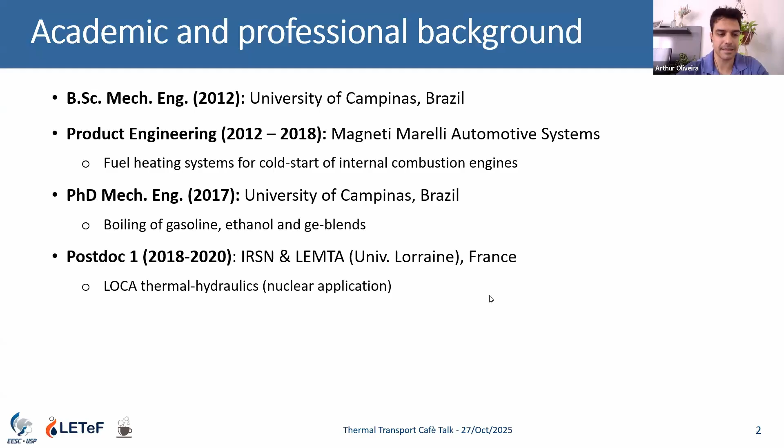Matt just presented my background. My last postdoc is part of what I want to present here, about tests near industrial conditions done at IRT M2P in Metz, France, together with the laboratory from the University of Lorraine, focused on applied and theoretical mechanics and energies. As I said, what we are doing now regarding droplet impact heat transfer is at the University of São Paulo, here in São Carlos City. I'm highlighting São Carlos City because normally people think of São Paulo City for the university.

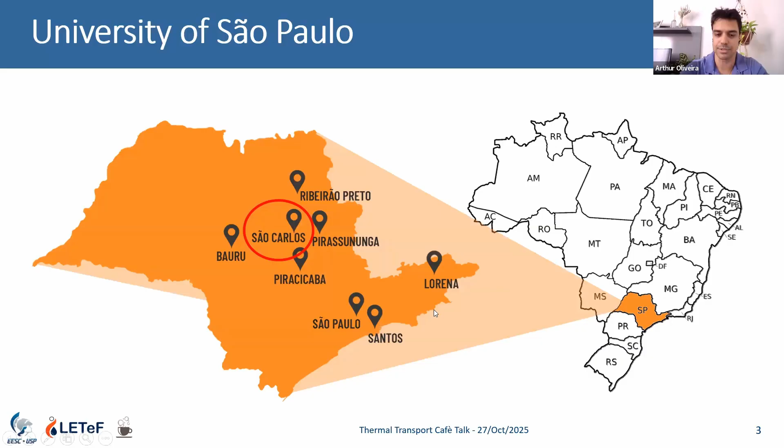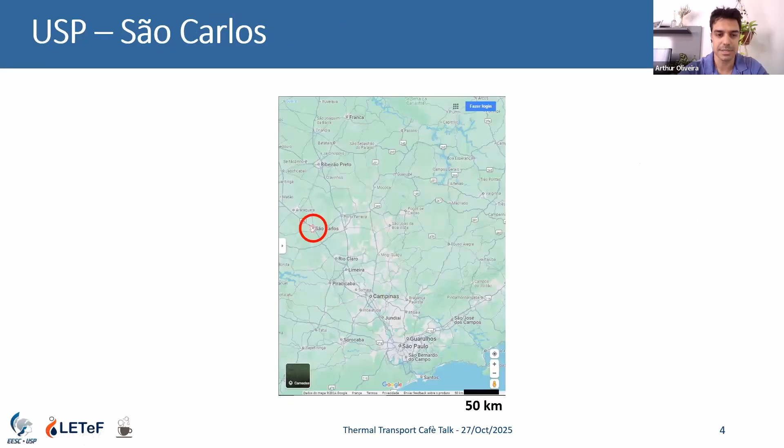When you think of Brazil, you have the state of São Paulo, and you normally think of beach and soccer and very good weather. But sorry, in São Carlos you don't have this because we are quite far from the beach, so you have to go to Santos if you want good soccer and good beach, especially for the soccer team. But if you come to São Carlos, it's close to good city, good barbecue, good nature, good beer, good food, and good coffee. So if you come to São Carlos, I'll be very glad to welcome you and show you the places.

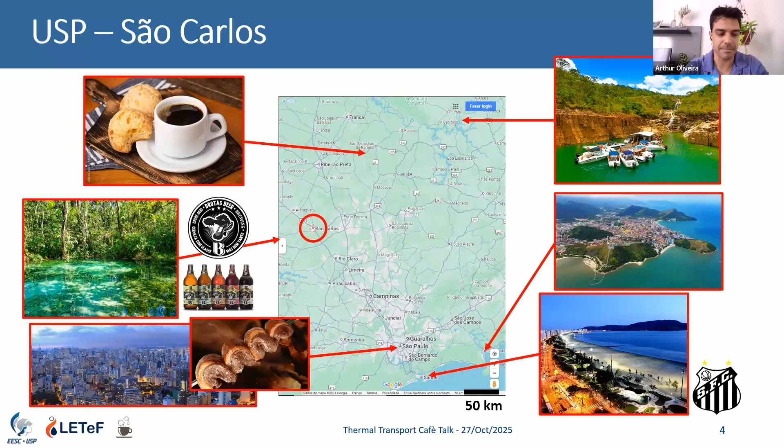So that was just a brief introduction, this marketing moment for the place. Let's go to the talk. I'm going to present the motivations of the research we have been carrying on here in São Carlos.

I'm going to talk about these near industrial conditions tests regarding quenching. This was done in France during my postdoctoral fellowship with Michel Gradeck and David Maréchal from the University of Lorraine, and David from IRT M2P. These results counted with the collaboration of Didier Lawrjaniec from Nova Asco, formerly Asco Metal, and Antoine Avrit, who was a PhD student at LEMTA and is now at CEA.

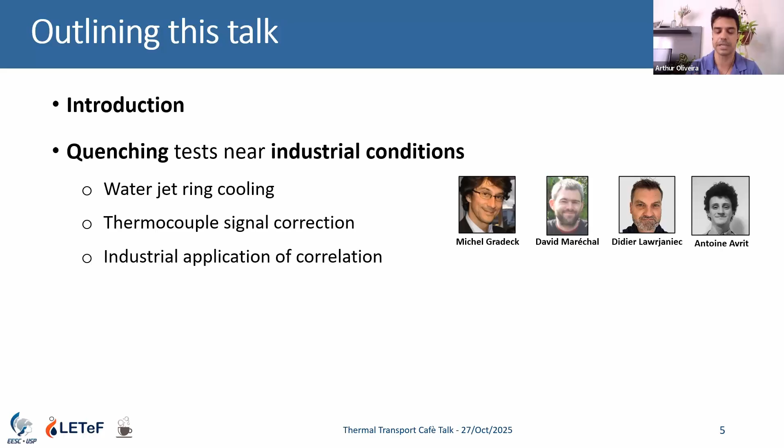Because of this industrial background, I try to link in my research the fundamentals and the applications for research involving quenching. Here in São Carlos, I'm going to show some very recent results we published regarding droplet impact heat transfer. The idea is to go from single droplets to spray and present you a new model that we developed.

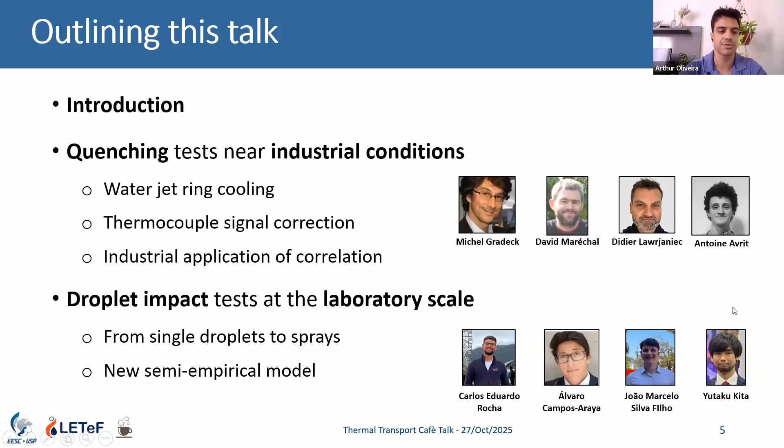Here are the students involved in the project: Carlos, Álvaro, and João Marcelo. This also counted with the collaboration of Dr. Kita from King's College London, who also gave a talk here at TTC a few years ago on a similar subject, so we had a lot to collaborate on together.

Quenching, for those not familiar, is the rapid cooling of a metal alloy, where we intend to tune the properties of the alloy after the process, especially regarding hardness and mechanical resistance. We have a cooling diagram for steel showing temperature over time. For instance, if I want to form martensite, I have to cool down the part very quickly in the first seconds to form martensite at the end of the cooling process. If I slow down, I may form some bainite, pearlite, or ferrite, which have lower hardness compared to martensite.

So when we are cooling down the part to form martensite, that can be very challenging because we are talking about very high heat transfer rates.

That can lead to uneven cooling, so we are talking about stresses and deformations of the final part. When it's regarding large pieces, it's easy to form martensite near the surface of the part. But in the core, because of heat diffusion, the cooling process is much slower, so there you can form other phases instead of martensite.

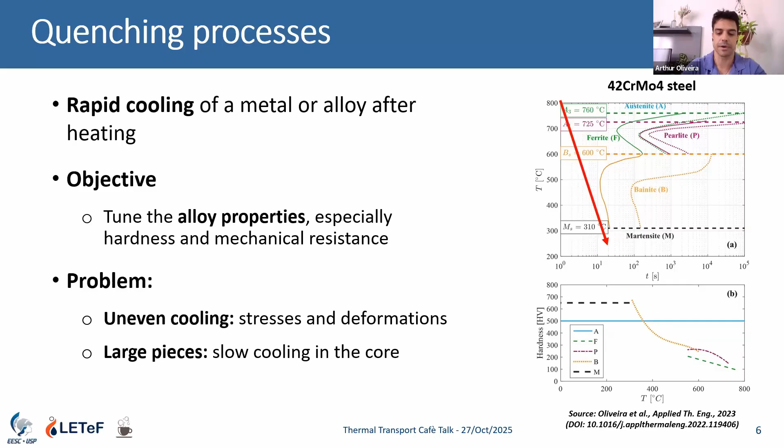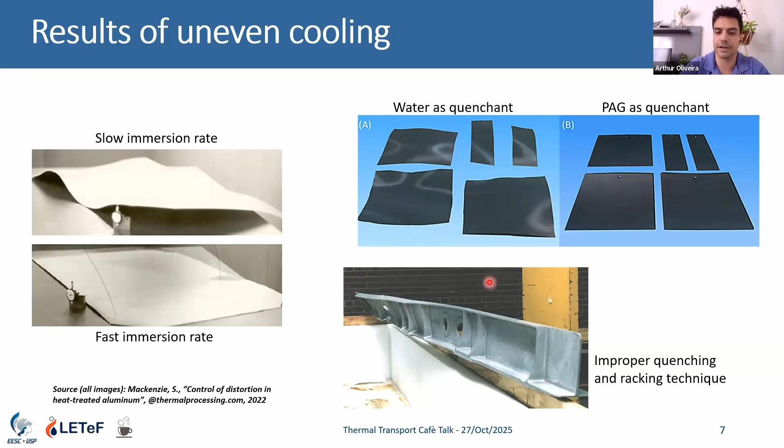To show you some examples, there are pictures by Mackenzie, where he shows the effects of uneven cooling over the surface, and we can see strong deformations of the parts here. So it's very important to design your spray system, your quenching system, to have an even and appropriate final part for your application.

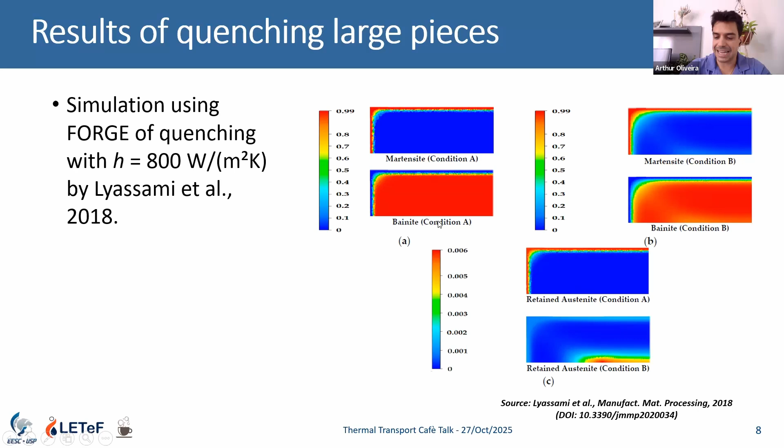For large pieces, there is this simulation by Lyassami and colleagues, where we can see the martensite formation. It's very stable and easy to form near the surface, but in the core it's not that easy. So that's what motivates a lot of research on quenching processes in the literature.

We have a lot of studies regarding plate cooling with jet impingement and also bar cooling processes, also with water jet impingement. The thing is, many of these studies involve small samples, starting at relatively low temperatures depending on the application, and most of them are also testing only one, maybe two nozzles. In the industrial case, you normally have several nozzles working together.

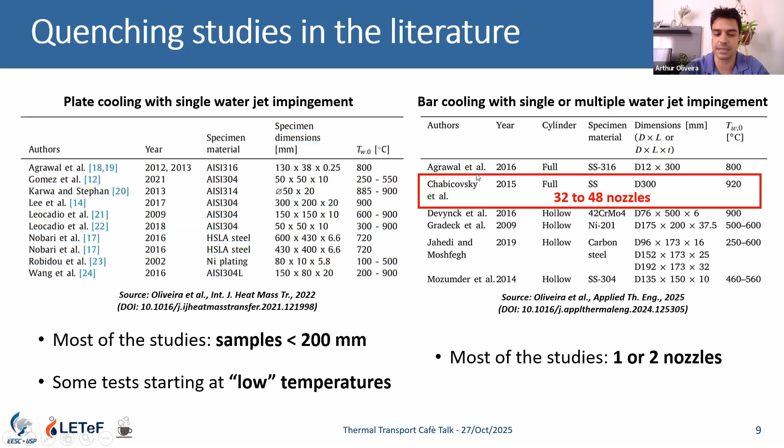I have to highlight the work by Chabicovsky and colleagues from Brno University, where they used 32 to 48 nozzles in a very large piece. This study is indeed very close to the industrial case, but we can see it lacks in the literature, this kind of data. That was the motivation a few years ago, even before I did my postdoc there.

At IRT M2P, together with some industrial partners and LEMTA, the laboratory at the University of Lorraine - the IRT M2P is the Institute for Research on Materials, Metallurgy, and Processes - they built this quenching pilot where they could evaluate the cooling process of large pieces near industrial conditions.

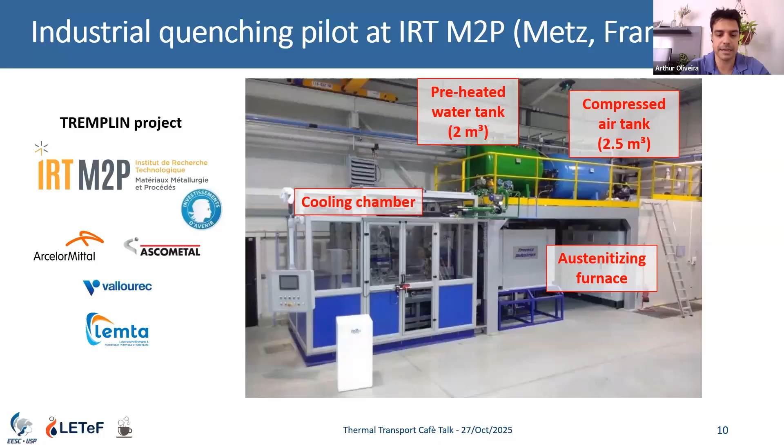So they have a furnace, they have the water line, the compressed air to pressurize the water line, and where the cooling process takes place here at the cooling chamber, inside the cooling chamber. I'm showing you this picture so you can have an idea of the size of the equipment - this must be a quite big experimental bench, but here you may have more details with this schematic drawing.

You have here the furnace, the bar cooling here, the water line - the water is pressurized by the compressed air, so you control pressure and temperature of the water aspersion over the part. In this case, I'm going to show the results for a steel bar: an 80 millimeter diameter bar, approximately 1 meter long.

The thermocouples are located very close to the surface, and they have a regular spacing, which allows us to characterize the heat transfer process along the bar axis. Here are some characteristics of the systems.

The jet ring I'm talking about - I'm going to show you an image soon. We are talking about 120 holes in the water jet ring impinging the bar. They have a small diameter. The initial temperature of the part is quite high - it can be higher in the industrial case, but it's above the austenitizing temperature, which is enough for the quantification of the cooling process.

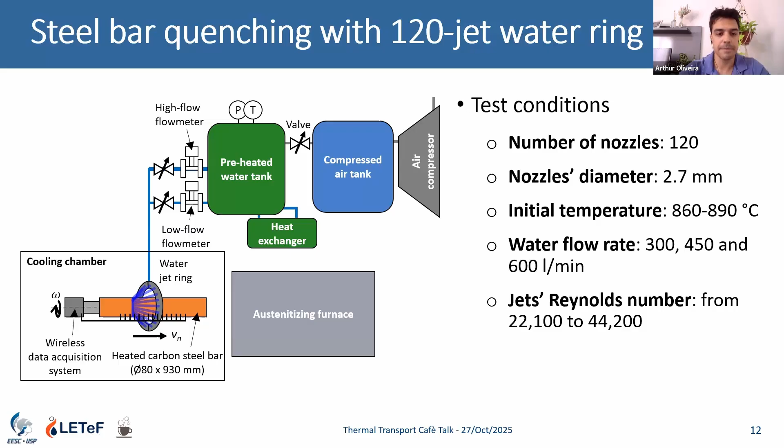Better than showing this image is to show a video. So this video is of the setup at IRT M2P in Metz, and I'm going to run it.

I tested before with Matt if you could hear the sound of that video, but you couldn't. It's quite noisy with all the equipment moving together.

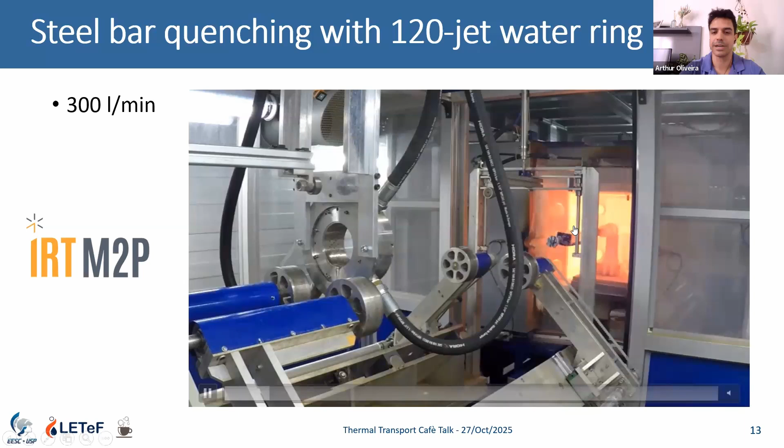Here you have the water jet ring system that I told you about. You can see the hose, the furnace, the bar leaving the furnace, and this box here is where we have the data acquisition system for the thermocouples. We can see the thermocouples over the part, crossing the bar, measuring the other side of the piece.

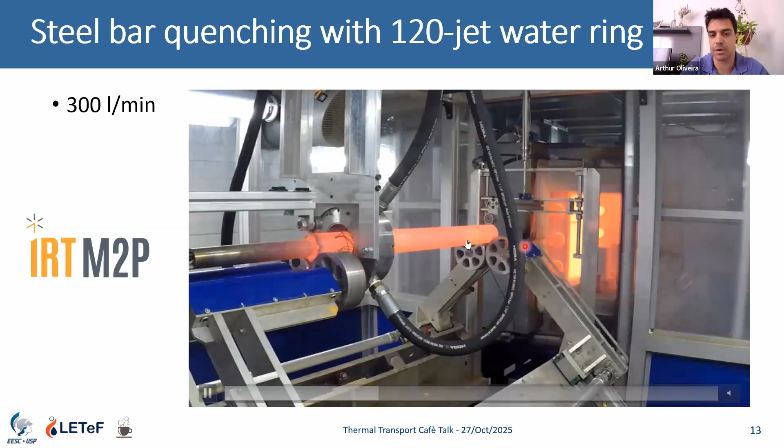So it starts rolling. You start the water injection, you close everything, and we have to wait until the flow is stabilized. So it's stabilizing the flow here before starting to sweep the bar. It's going to start soon.

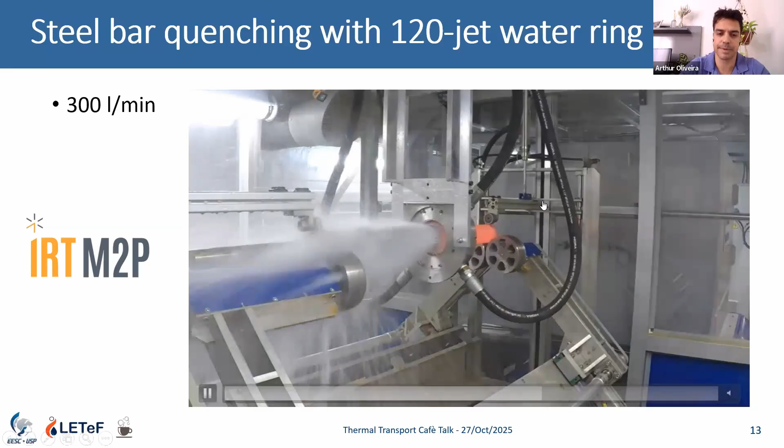During this process, we start the temperature measurement, acquiring the temperature measured by the thermocouples during this cooling process. We have to remember that in an industrial process you have several rings, and the bar passes inside these rings. To simulate this, after finishing sweeping the bar, the ring comes back to the start position and starts sweeping again, doing that several times. The experiment lasts about 2 minutes, going back and forth while we acquire the temperature.

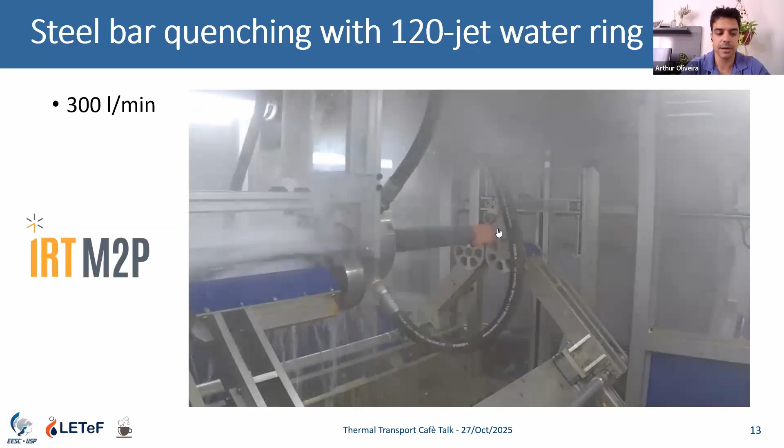To quantify the results, it's not only the temperature measurements that matter. We want to quantify the dissipated heat, the heat flux, as a boundary condition for this bar. We consider constant properties, an axisymmetric problem in cylindrical coordinates. After a few simulations, we realized we could neglect the axial heat conduction in this process to quantify the heat flux, so we have a 1D transient problem that can be solved, for example, using Laplace transform.

We have the temperature measurements, and we have the thermal impedance that we can calculate with the equations I showed, knowing the material properties, geometry, boundary conditions, and thermocouple position. But we want to estimate the boundary heat flux, and that's the ill-posed problem.

So we need regularization here. There are several methods in the literature. We used Beck's function specification method, which gives us a pseudo-analytical solution for the heat conduction problem. The advantage of using a pseudo-analytical solution is that you have very fast computation of the data, and you have quite good accuracy to compare the results.

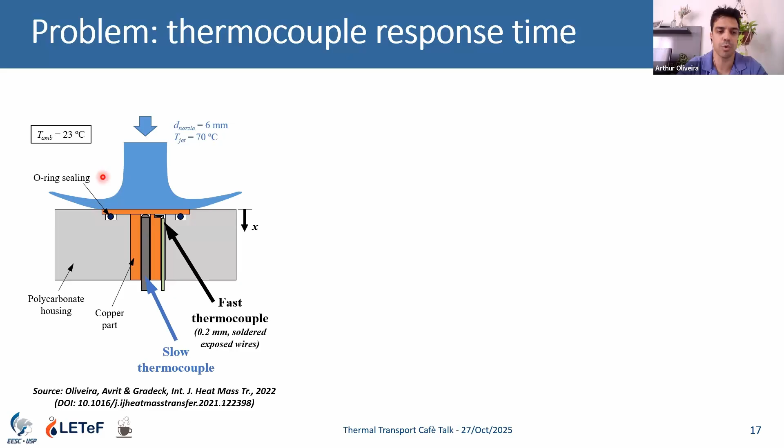In this prototype experiment, you put a fast thermocouple together, and then you put hot water from a kettle, for example a boiler—you can boil water and put it over your part. Then you compare the thermocouple responses.

When you do this, you have the fast thermocouple here, the thermal response, and the estimated heat flux with this fast thermocouple. When I use the slow thermocouple, for example a 1 millimeter thermocouple, the thermal response is dampened, and the heat flux estimate is a little affected.

So the method we propose can reconstruct the thermocouple response. You can see it's very close to the reference, the black line, and the estimated heat flux gets much better. We also tested that for a very slow thermocouple, a 3 millimeter thermocouple, with a very slow response time.

You can see the response time is comparable to the experiment time. After correcting the thermocouple signal, we don't care too much about the temperature measurement, but you can see that the estimated heat flux is much better with the signal reconstruction compared to the original signal estimates.

So in all the quenching tests that I'm going to show you now, the results, we are using this method to correct the thermocouple signal and have a better result of the heat transfer process.

For those who are interested, we have this paper here so that if you want to do this test on your own, using your own instrumentation, we made available the code for you to estimate the thermal response, the response time of the thermocouple, the heat loss parameter, and also the code to correct your thermocouple signal if you are using fast cooling or heating processes. We made this available exactly to have better results in the literature.

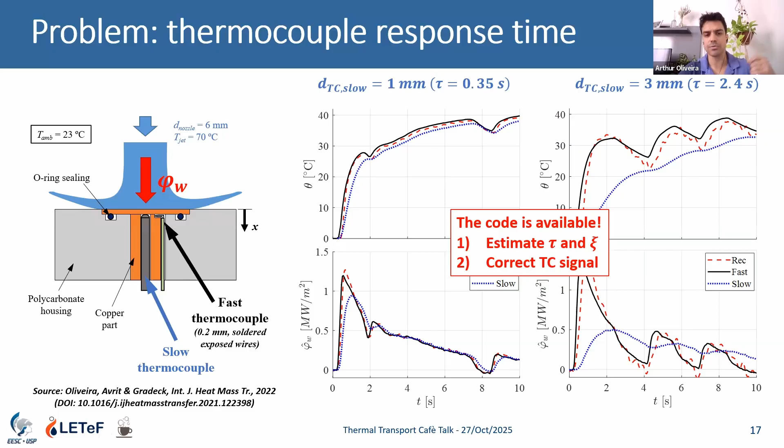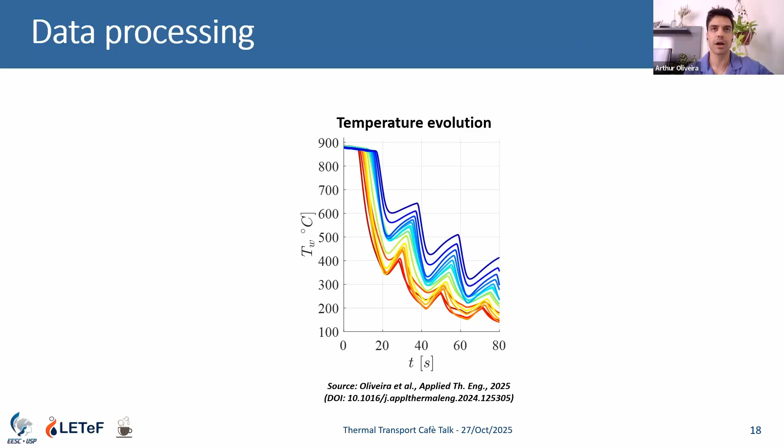So the results we had from the bar—we have 15 thermocouples here. These results that I'm showing you already account for the thermocouple correction method that I showed you.

With this response time, we can estimate the boundary heat flux with the inverse method that I showed you over time. We can take the peak heat flux for each ring pass, and that point we're going to consider the maximum heat flux point.

These points are going to be very useful for us for the data analysis. If we take the derivative of the temperature, we can also have the maximum cooling rate point, where the derivative is maximum in absolute value. That's also going to help us in the processing, as well as the onset of cooling point.

So you have air convection and radiation at first, but when the jet impacts the thermocouple location, the position, we have a sudden drop in temperature. This is the point that regards the onset of quenching, or onset of cooling, as you prefer. Keep in mind these 3 points—we're going to use them later.

Going to the results for 300 liters per minute: we have thermocouple 1 on the left-hand side, and thermocouple 15 on the right side. Over time, we have the temperature responses here. As we expect, the ring goes from left to right.

So the temperature drop is important in the first thermocouple. Then the last thermocouple sees the same, gets the same result. And here you can see the evolution in the heat flux over time for each thermocouple.

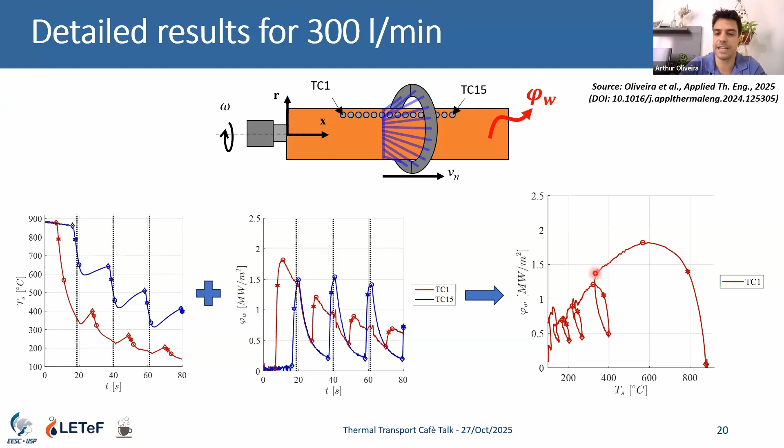Let's say for one thermocouple, you have here the onset of cooling, maximum cooling rate point, maximum heat flux. Then you have the cooling process, the end of the first pass, the decay in the heat flux, and this loop profile of the boiling curve.

And we can do that for the 15 thermocouples, and now you can't see anything else. It's very hard to analyze anything from this mess.

So what we realize is that, what if we reject unphysical data? Because as we are using an inverse method, we have unphysical results here. For instance, let's say this is for a simulation here, heat flux over time.

Let's say I want to estimate the heat flux profile evolution as the black line. When I apply my inverse method, there is this regularization that causes a kind of penalization, a kind of degradation in the heat flux estimate to stabilize the calculations.

So this part here of the calculation, where we see this increase and then this loss of the peak, is not physical. This is a mathematical feature of the method, so it's not a reliable result, this part of the result.

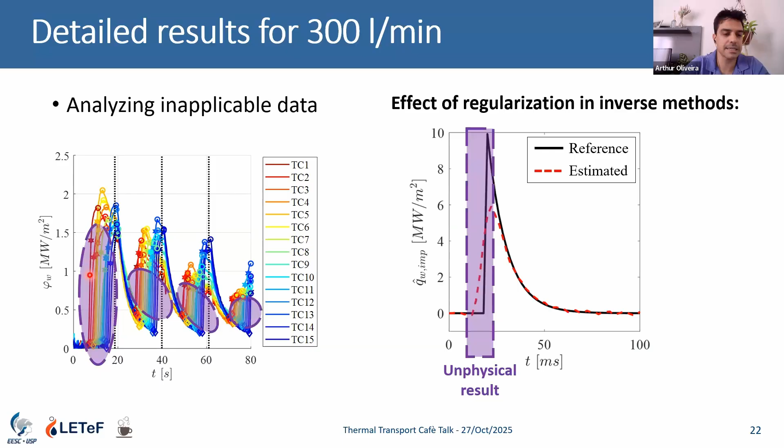So considering our simulations, our results with the bar cooling, this raise in the heat transfer, heat flux must be neglected. And the other characteristics, now considering the industrial process, our test will have the static bar and the ring is sweeping the bar.

But in a real industrial process, we have several rings and the bar is passing inside the rings, so we don't have this kind of dry moment of the bar in our industrial setup.

So we can try to neglect also this heat flux decay to try to represent in our experimental setup the industrial case. So when we do this in our boiling curve and we remove the unphysical data, now we have a kind of correlation between the heat flux and the surface temperature.

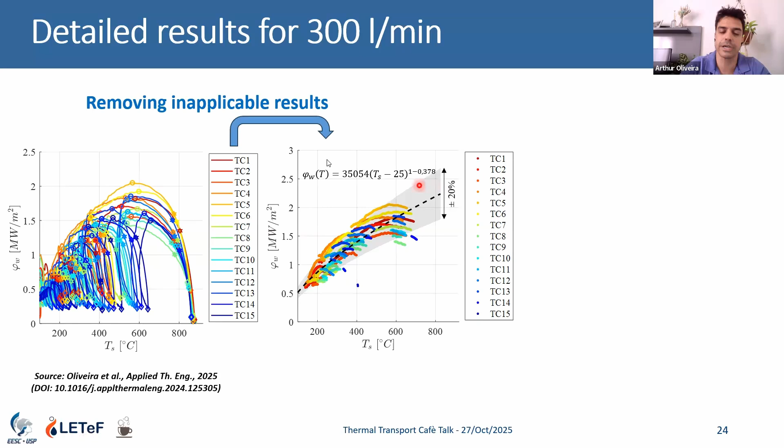Now we just see this kind of correlation. We can try to fit an equation here to relate the heat flux and temperature. And we can also translate that to heat transfer coefficient, depending on the industrial partner preference.

We have a very minor effect, actually, but we try to understand what happened here. Why didn't it increase?

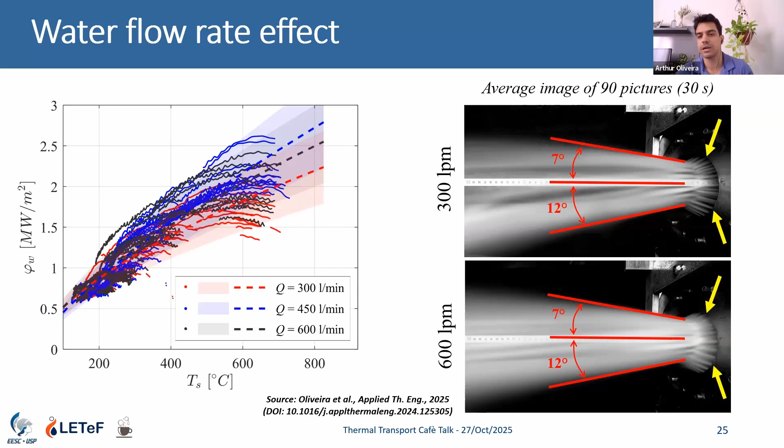What we realized, we have a difference here at the nozzle. When you compare the three conditions, we can see a kind of fog near the nozzle for 600 liters per minute. So we're starting to have some atomization here, which was confirmed when we put that in the Ohnesorge diagram. We are getting closer to the atomization regime.

So as we are talking about 120 nozzles, when you have the atomization, this droplet will be dragged by the air inside the systems, or even by the jet, and maybe will not even reach the wall. So that can be kind of a degradation of the heat transfer.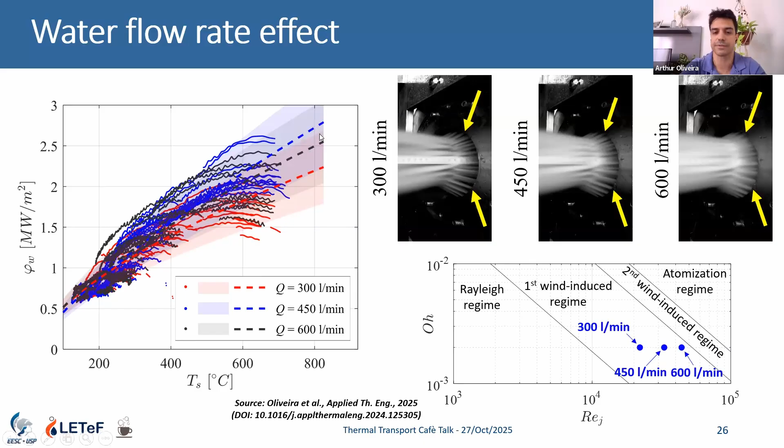Because here we are talking about a much larger scale compared to what we see in the laboratory. We are talking about many more nozzles, a much higher water flow rate. So maybe we kind of reach a saturation here in the heat transfer. But this is a very strong affirmation to make.

So after a new test with a thermocouple in the core, because if we have very different heat transfer conditions, we should see a temperature difference in the core of the material after a while. But when we did the test, after 2 minutes of cooling, there is no major difference in the temperature measurement in the core of the part.

You can see that after a 500 degree drop, there is only 2 degrees difference between the two tests for the two flow rates. So no, there is no major effect of the water flow rate in these conditions, of course.

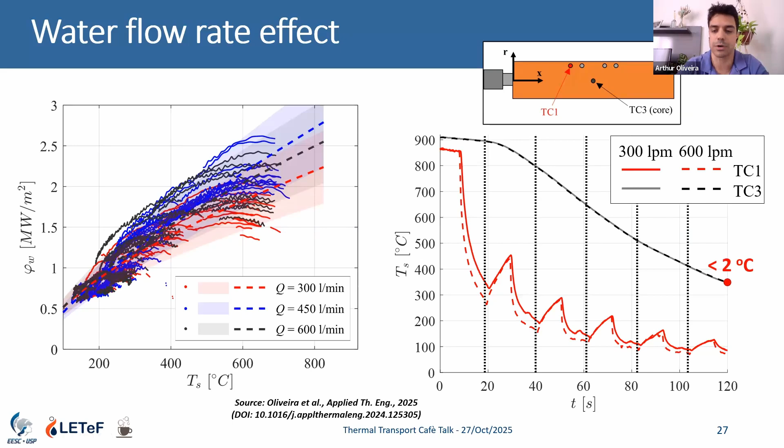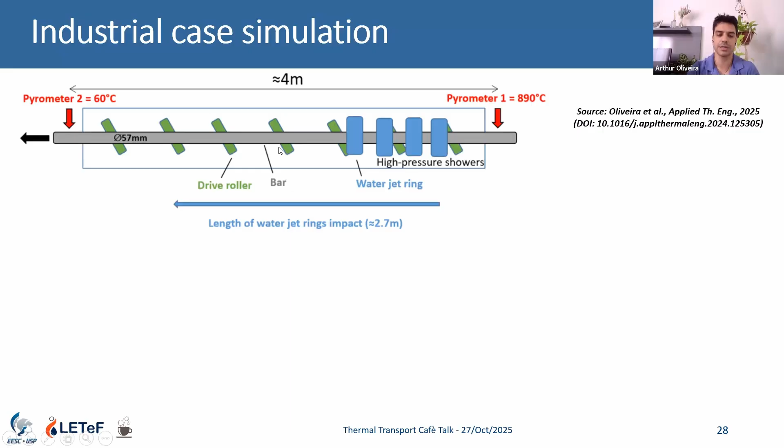And when we use the correlation we proposed for a real industrial test, so here we have a real industrial line, we consider the parameters to use the correlation, we consider metallurgical effects, and considering that there is a very simple equation to put in your model...

we quite had a sufficient, sufficiently accurate result, let's say, comparing the experiment and the model. After almost 900 degrees temperature drop, we had only 80 degrees difference between the model and the experience, the simulation, the experience.

And that can also be related to nonlinear effects, because when you have phase transformations, you have latent heat of phase transformation, and you don't have constant physical properties. So that can play a role.

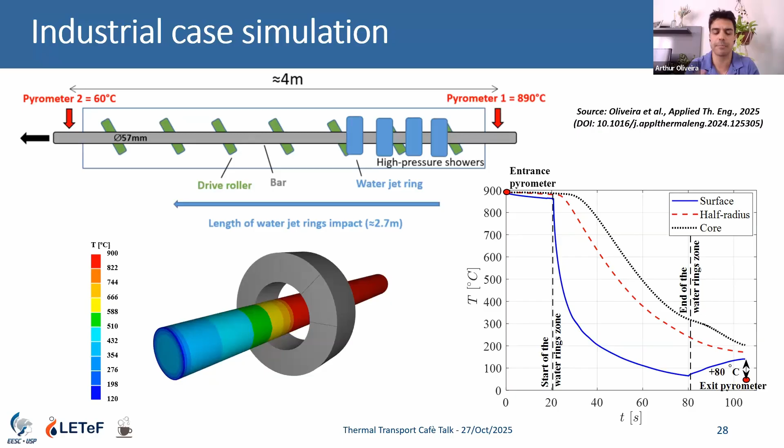So that's the first part of the talk, when I wanted to show this industrial condition, because what happens is that during this industrial background that I had, when you have a problem in the industry and want to solve it, sometimes you need to scale down your problem to try to answer it. And that's why we need reliable and high quality laboratory data to apply to the industrial case. It's not new what I'm talking about, but when you have a scale change in engineering, this problem can go from industrial case to pilot scale to laboratory scale. And that's very challenging when involving phase change processes.

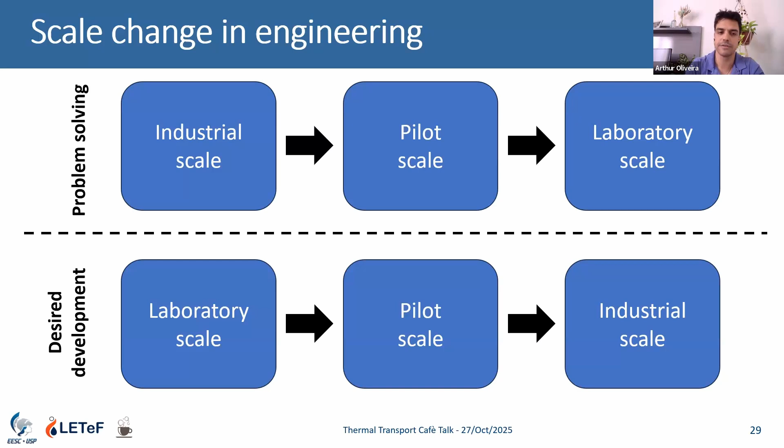And also for development, and I think that's one of our roles in the university, you have a desired development, you see something at the laboratory scale, you try to increase the scale, and that can also be very challenging, sometimes frustrating, to not see exactly the same phenomenon as we scale up or down the problem. So that's actually the motivation of my research here at the University of São Paulo regarding quenching using sprays.

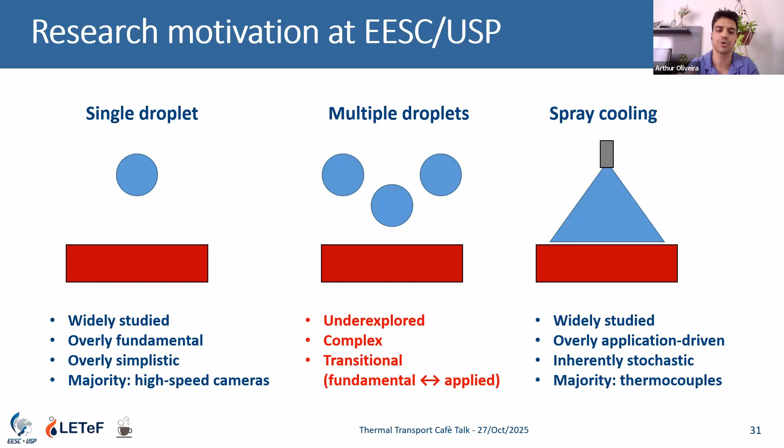We have a lot of data in the literature regarding single droplet impact heat transfer, but that's actually too fundamental. And we also have a lot of spray cooling data in the literature, but that's very application driven. Sometimes one result for spray cooling cannot be easily extrapolated to another condition. So maybe testing multiple droplet impact is a way to link the two problems. So that's the objective of our research here at the Laboratory of Thermal Engineering Fluids.

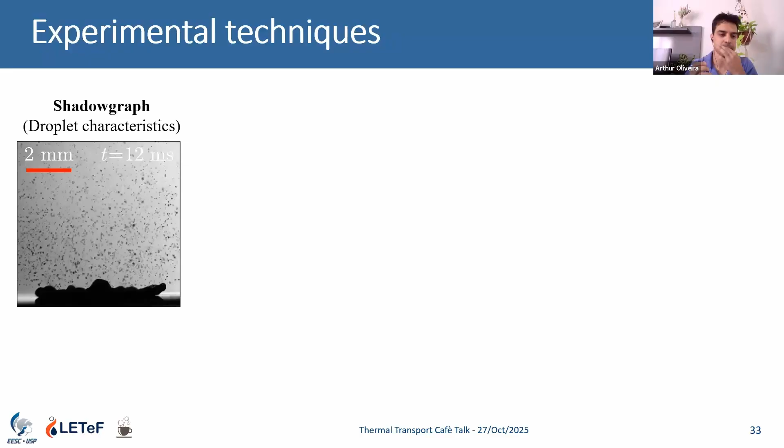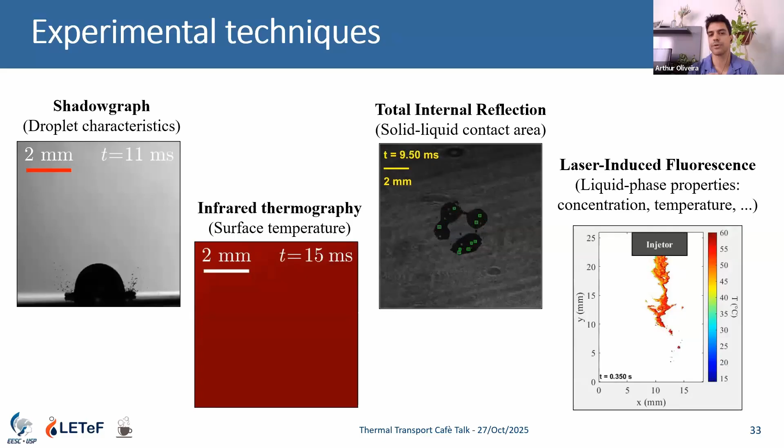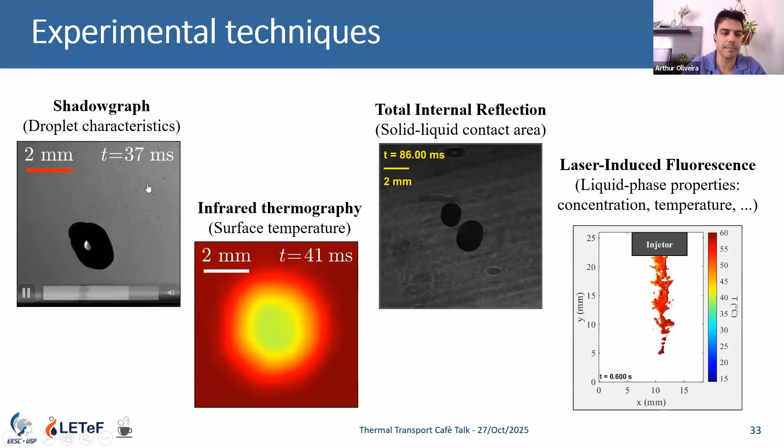So we use shadowgraph, infrared thermography, and total internal reflection as techniques, as well as LIF to measure the liquid temperature. The videos I'm showing are examples of results we had here in the lab, but to focus on only one result, I'm going to show results we recently had and published regarding shadowgraph and infrared thermography for droplet impact heat transfer over a metallic sheet.

So we have here the stainless steel plate, which is heated by Joule effect. We characterize the droplet impact by shadowgraph, and the infrared camera measures the surface temperature. And here are some characteristics of the tests.

We have water as test fluid. We have a fixed droplet size of 2 millimeters. We vary the impact velocity by changing the droplet release height. And the plate was a 0.5 millimeter stainless steel plate.

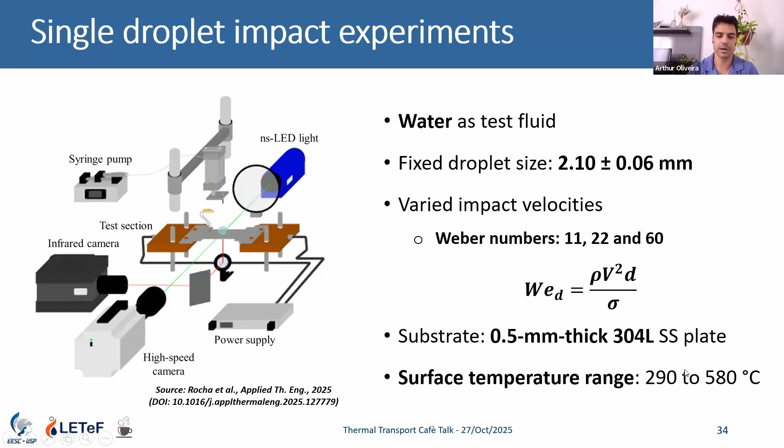As this is very new for us here in the group, the tests started by the end of 2023, so it has been almost 2 years that we started having the results. We started with relatively low temperatures, and now we are starting an experimental campaign to go to much higher temperatures.

But the raw results we have from these experiments are the shadowgraph images that you can see here and the infrared images. And you can see some characteristics of the image acquisition here.

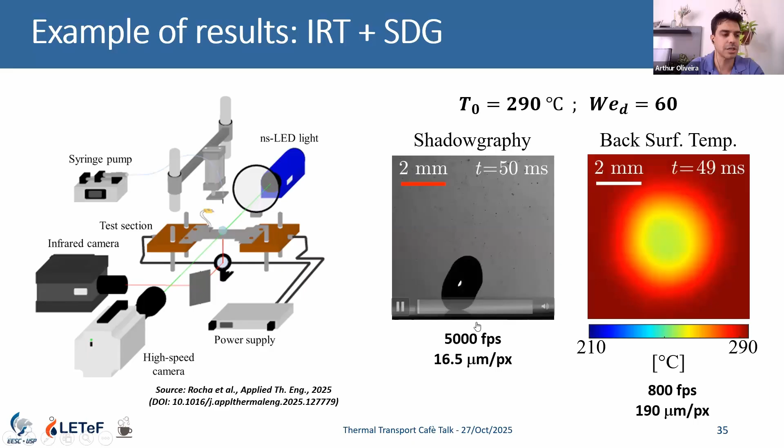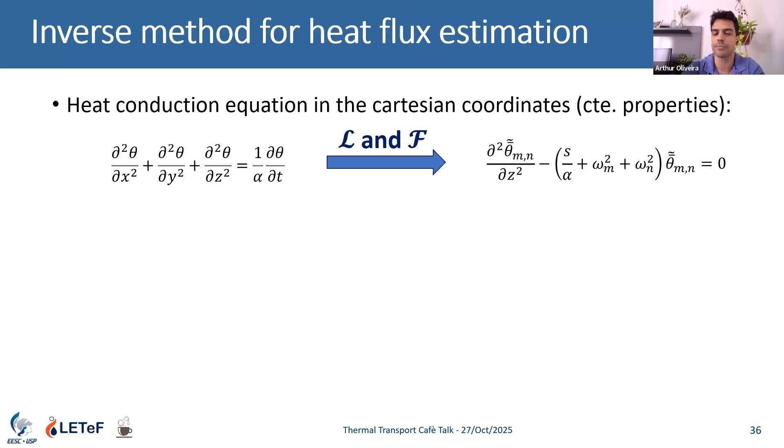So as before, we need to develop an inverse method here to quantify the heat flux field over time for our droplet impact process. Now we have a 3D transient problem, and we use Laplace and Fourier transform to get an ordinary differential equation. Using Laplace transform, we have the solution in the Laplace space. And we also use the same algorithm to invert the Laplace function.

And we discretize that by considering a constant heat flux profile per time step. The difference now is that we are estimating the heat flux harmonics in Fourier space, so we need to go back to the real space using Fourier cosine transform in our case.

And we can also estimate the temperature of the plate by solving the direct problem using the estimated heat flux. So we estimate the temperature harmonics and finally the temperature field during the droplet impact. Because with a metallic plate, we are measuring the back surface temperature, but I'm interested in the surface, the impacted surface temperature. So that's what we are estimating with this equation.

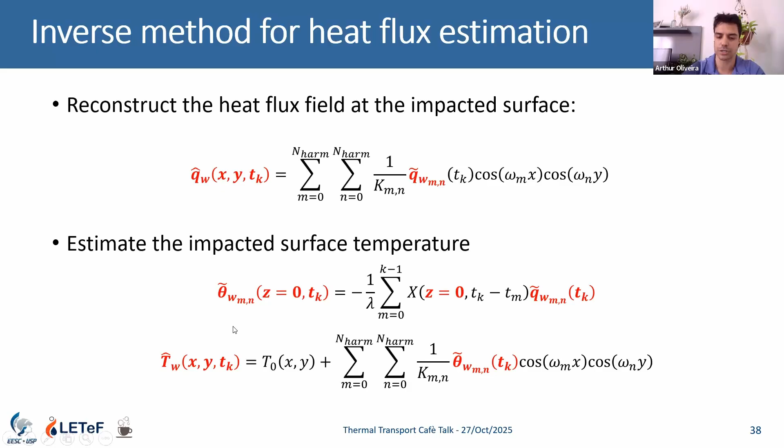So here you can see the results. We have the shadowgraph here, very nice images. This is the infrared thermography images. And this is what I showed you, the estimates from the heat inverse method, the heat flux evolution over time and the impacted surface temperature evolution over time.

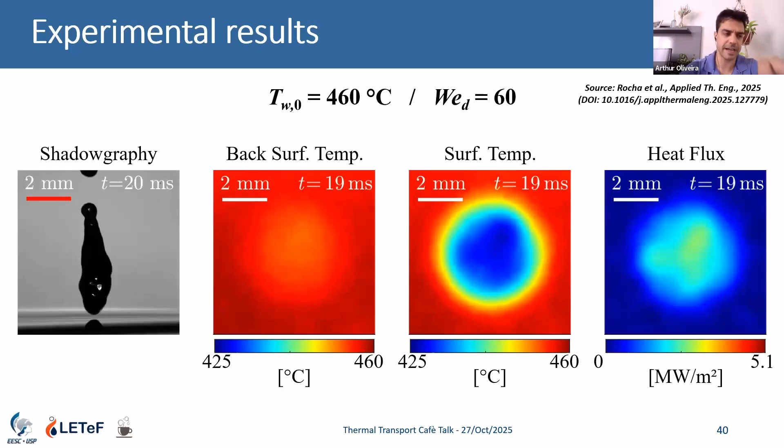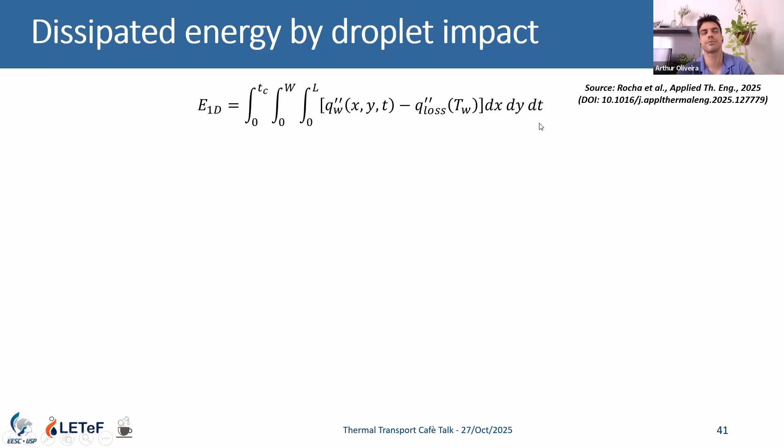But as I said, I'm interested in the amount of energy that's dissipated during the droplet impact. So we need to integrate the heat flux over time and space, and when you do this, we go from megawatts per square meter to joules of energy.

One interesting thing that happened: I presented preliminary results at a conference in Edinburgh, hosted by the University of Edinburgh in 2023. Talking to Dr. Yutaka Kita, he had very different results compared to what I had. So we decided to investigate that together.

Carlos was an undergrad student here from the lab. He spent some time at King's College under the supervision of Dr. Kita.

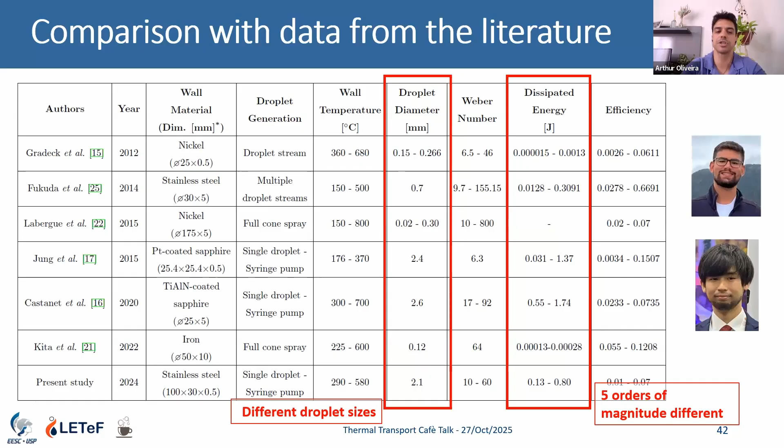After compiling a lot of data from the literature, there is a very big difference in the amount of energy reported. There are some results of microjoules of energy and others of joules of energy. That's evidently because of the droplet sizes tested. If you test much larger droplets, they're going to dissipate much more energy, that's for sure.

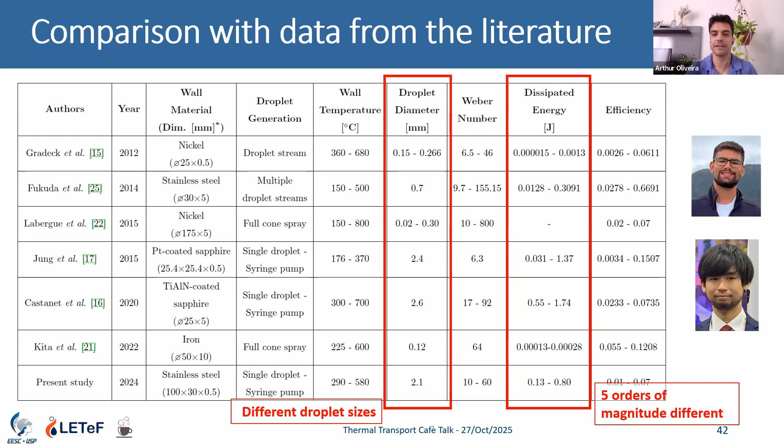But we also compared that for very different droplet generation methods, from single droplet to droplet streams to spray cooling. So although working with five orders of magnitude can be tricky, there are some studies that work with effectiveness, or what we prefer to call efficiency, of the droplet impinging cooling process.

The droplet heat transfer efficiency is the amount of energy the droplet dissipates, normalized by how much energy it could dissipate, let's say if it was heated until saturation and then completely evaporated. When we do this for single droplet impact, droplet stream, or spray cooling, even for those very different droplet sizes, all the efficiencies now fall inside the same order of magnitude.

So that was very nice to see, the droplets collapsing very close together to the same order of magnitude. That's reasonable because the droplet mass depends on the third power, the cube of the droplet diameter.

So what we decided was, okay, what if we try to model the droplet efficiency to see if that works? And then we tried to do a scaling law model just to see how it was working. So let's say the droplet impacts the wall at a given velocity and has a size d at time 0.

And during the contact time, it becomes a pancake with a diameter dc, constant vapor thickness, and we have heat conduction during this process. Then the droplet bounces off the surface.

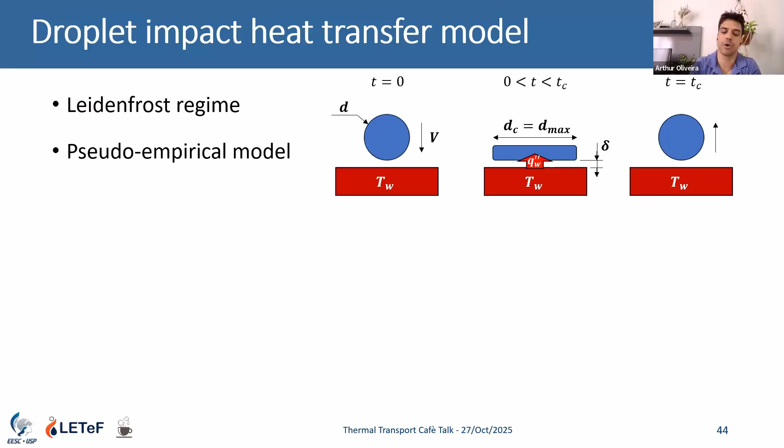We have a scaling law process, as I said. We are working in the Leidenfrost regime, so the data we collected only regards the Leidenfrost regime, at least as reported by the authors. And then we have the total dissipated energy as the integration of the heat flux over time and space.

So if we consider heat conduction, we have heat conduction through the vapor layer, and then the vapor layer thickness plays a role here.

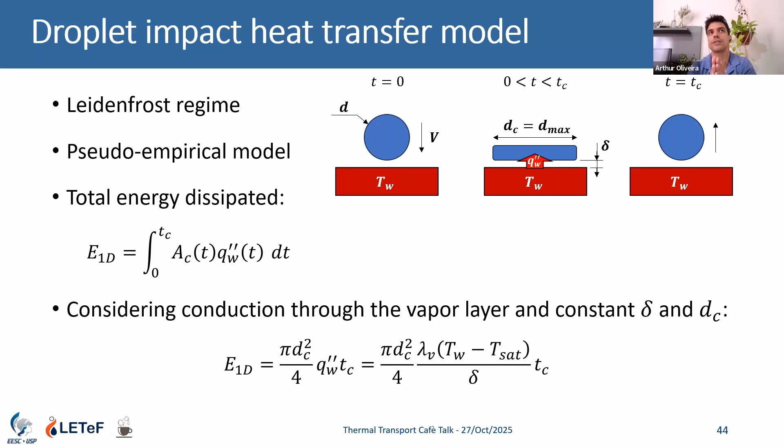And when we wanted to apply the scaling law, let's not take the vapor thickness for an impacting droplet, but for a sessile droplet for a moment. That's a quite well-accepted model at the moment in the literature, as reported by Anne-Laure Biance and Guillaume Castanet.

And then we have this model here. Let's put that in the equation. And now we have a contact diameter and a contact time to model here.

So we took our results and we saw that it depends on the Weber number to the 1/3 power. This exponent can change a little from the literature, but we have other authors that reported the same power as us. And we used Rayleigh oscillation time here as a characteristic time.

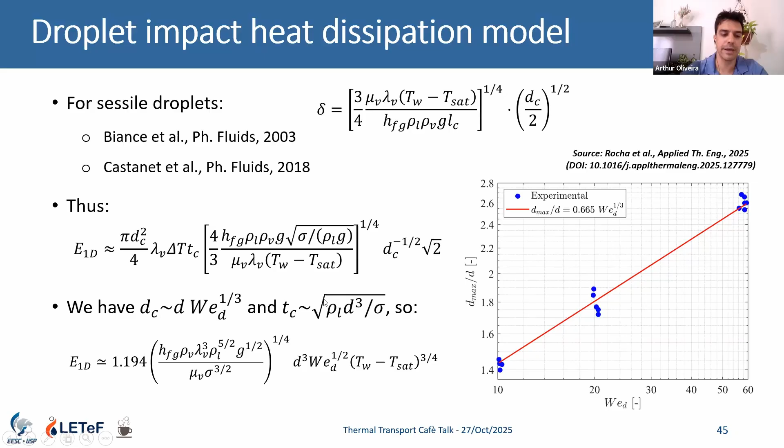And then when we put that in, we have this equation for the amount of energy which is dissipated. So if we put that as an efficiency now, it suffices to divide that by the maximum energy it could dissipate. And if we take that for water at 1 bar, the sensible heat is about 14% of the latent heat. So if we take this and put them all together, this big equation becomes this very simple correlation here.

Where we now have the efficiency depends on the temperature difference and the droplet Weber number. We have a fluid parameter here, which we call xi. For water, for example, we have this value.

And now we have, as always, we need in a scaling law, a fit parameter. Considering the data we collected, the fit parameter is 2.8. So we were happy to see this parameter because it's in the order of 1, so the scaling law we used is not too far from reality. If we found, for example, a fit coefficient of 1,000, we'd see that something was not right, but it's close to 1, so those are good.

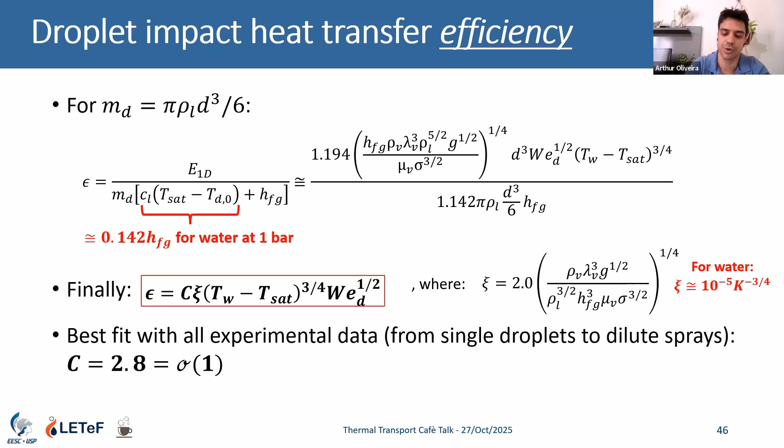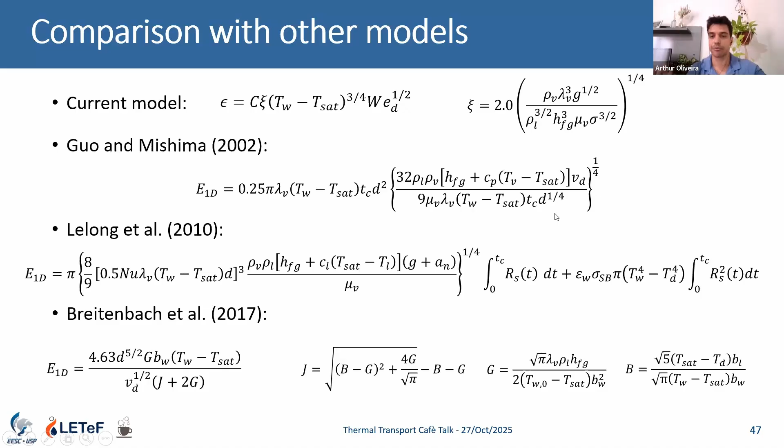That's good news actually. So what we did, let's compare that to other models from the literature. We have Guo and Mishima's, Lelong's and colleagues, Breitenbach and colleagues, where they had very elaborate models. And let's try to compare with the collected data.

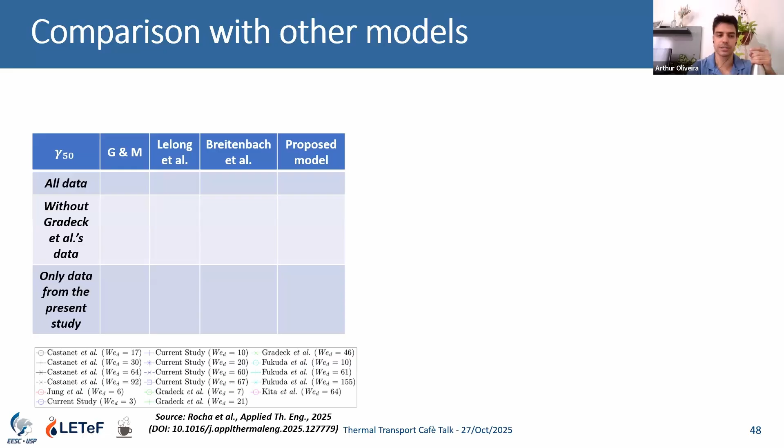But for this comparison, what we did, we used the parameter gamma 50. This parameter is how much data, the amount of data in percentage, is estimated correctly by the model with an accuracy of 50% or better. That's kind of funny because 50% is a lot, we know, but when you compare the models, we're going to see 50%. If we are within 50%, it's very successful actually.

And now we are considering all the data we collected. In this case, we are talking about more than 1,000 points.

We also did the analysis considering removing Gradeck and colleagues' data from the analysis, because among the more than 1,000 points, more than about 900 points came from Gradeck and colleagues' data. That's a very powerful database they have, and that's only possible because they did a transient analysis, which allows you to have a very good and very large database.

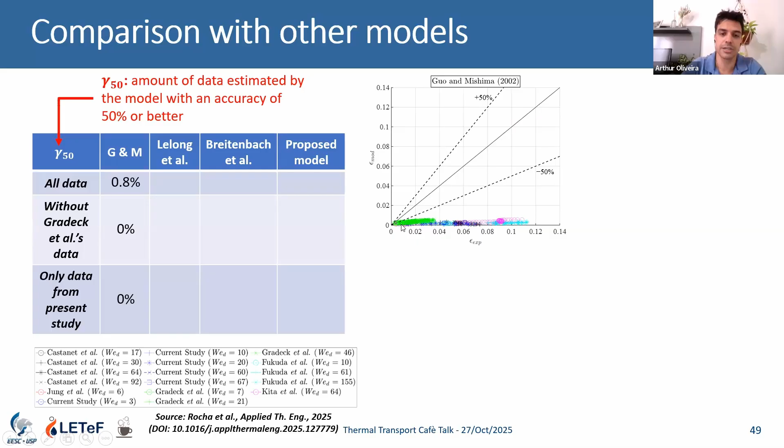So to be fair to the others, we also did this analysis removing their data and also comparing the data from our paper. And when you see this, Guo and Mishima's model performs quite poorly compared to the data. It underestimates a lot the cooling efficiency.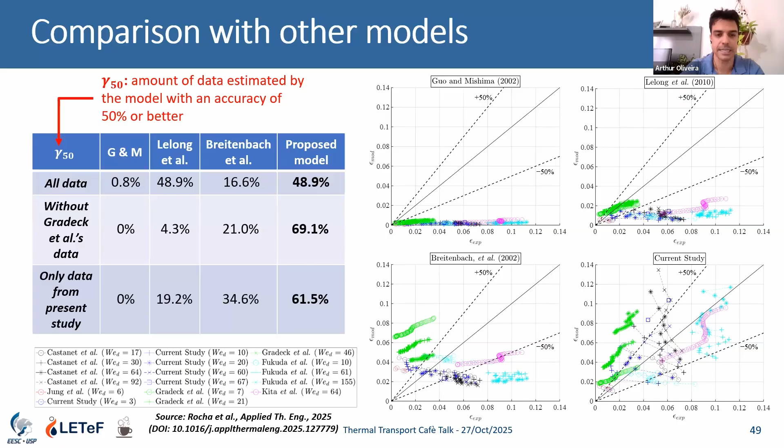So this has been very recently published here. That's something I was waiting to do in this presentation, to have some kind of validation of what we are presenting. But what we are working on now here in São Carlos is trying to improve this heat transfer model.

Okay, now we need to consider the dynamics of droplet impact. What if it's not in the Leidenfrost regime? So we have other techniques we are implementing.

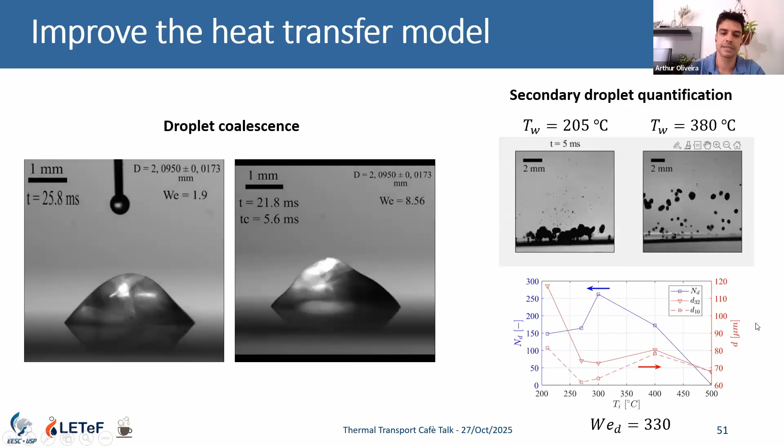We are quantifying, for example, the solid-liquid interface and droplet coalescence. When you don't have a dilute spray anymore, let's say we have a denser spray, we are starting to study droplet coalescence and secondary droplet quantification as well, because that's going to help us with the mass and energy balance of the systems. So it's still a work in progress, but that's what I want to talk about here.

And then the main thing, I know I did two talks in one, industrial scale and laboratory scale, because there is still this large gap between the two of them. And it's very challenging when involving quenching.

But the thing is, even for the same scale, for example laboratory scale, as I showed you for droplet impact heat transfer, we need these pilot scale experiments. But even at laboratory scale, we still have a large discrepancy between the data, the results, and the models. So we still need more research on that, even before, or maybe together with, a scale change in quenching and heat transfer. Because the idea here for our group today is that dripping droplets hollow out stone.

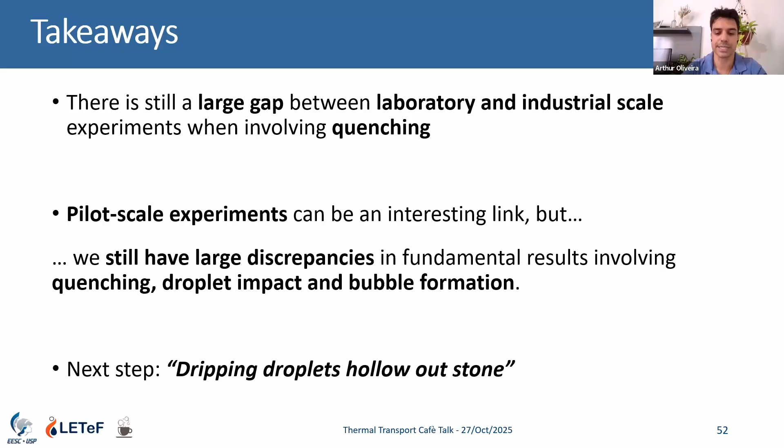The idea is that droplet by droplet, I'll have a spray someday. So maybe we need to start interacting the droplets, understand the dynamics and heat transfer involving interactions. And the concept of interactions can be tricky sometimes, but we need to investigate that to maybe go from lab to industrial scale. So that's what I had to present here.

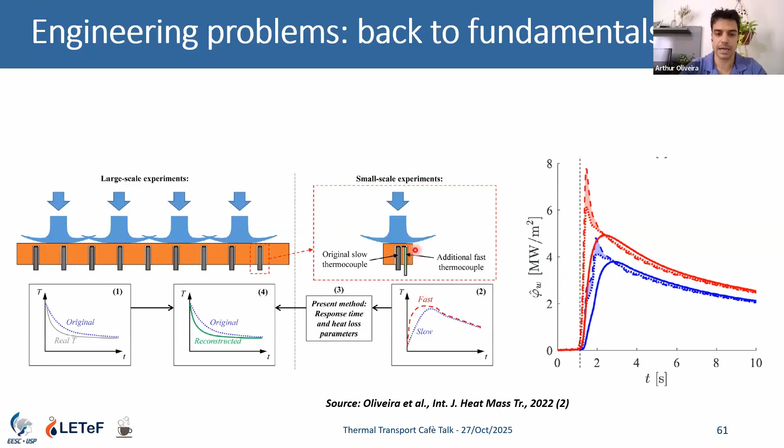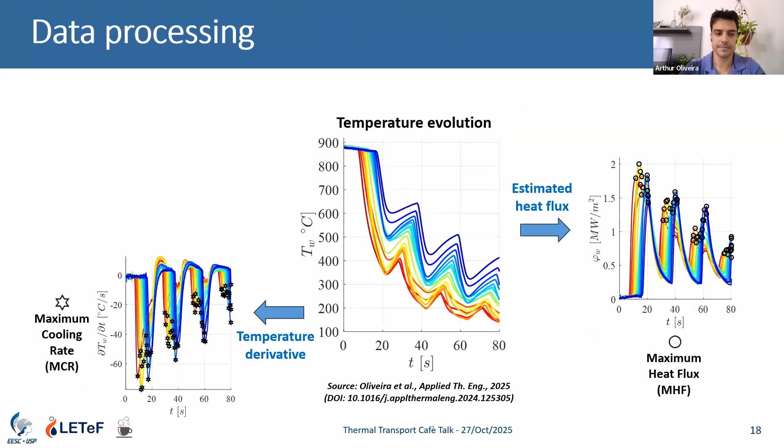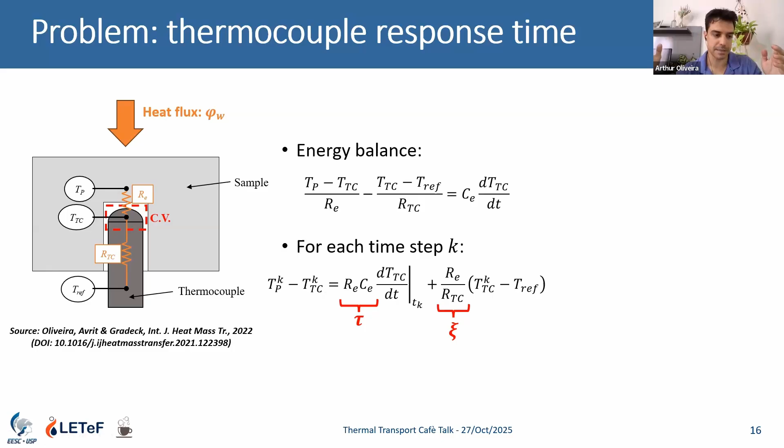So you have two strong hypotheses here: the fast thermocouple is ideal — though you can try to correct the ideal thermocouple too, but that's one hypothesis — and the other is that the contact resistance in the small scale experiment is the same as in the large scale experiment, so the parameters are the same. That's what you do later in the large experimental setup. I don't know if I was clear. Yeah, it makes perfect sense. So when you do the experiment, you have both measurements, and that helps. The main advantage is that since you don't need to know the contact resistance, you're estimating it, so it's a very customized estimate for your specific experiment and setup.

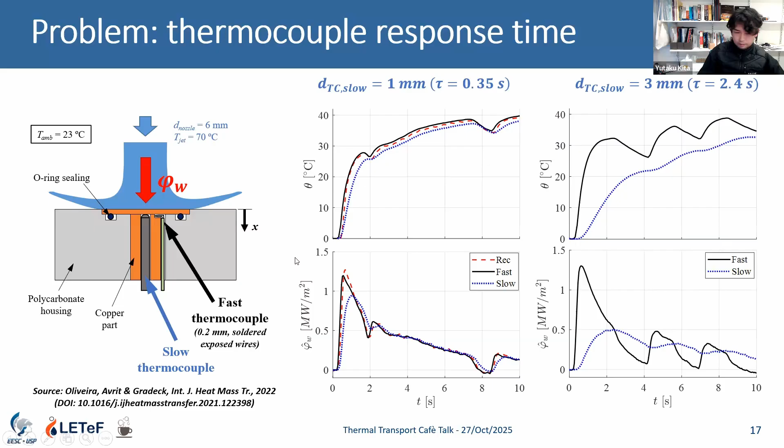I had a question, maybe we discussed this during the collaboration, but could you explain the infrared measurement? You must have some coating on the backside to enhance the emissivity. Can you remind me what kind of coating you used? That's a very good question, Yutaka. Thank you, nice to see you too.

For the infrared measurement here, we paint the back surface black with a black matte ink. That's actually one limitation we are now studying, because we are starting to measure the thickness of this ink, which may or may not influence the estimates. So the back surface is painted black to enhance the signal for the infrared camera.

Another important detail about our technique is that we do not need to know the emissivity of the black ink, because we use a thermocouple here, and at the same time we measure with the infrared camera. We have an insulated thermocouple on top.

So it's a very thin plate, and we do a kind of relaxation test. The top temperature and bottom temperature are virtually the same, so we measure the temperature from the thermocouple and the signal from the camera at the same time, then fit Planck's law using the two data sets. That's mainly possible because we paint the back surface to avoid reflection from the ambient temperature, for example.

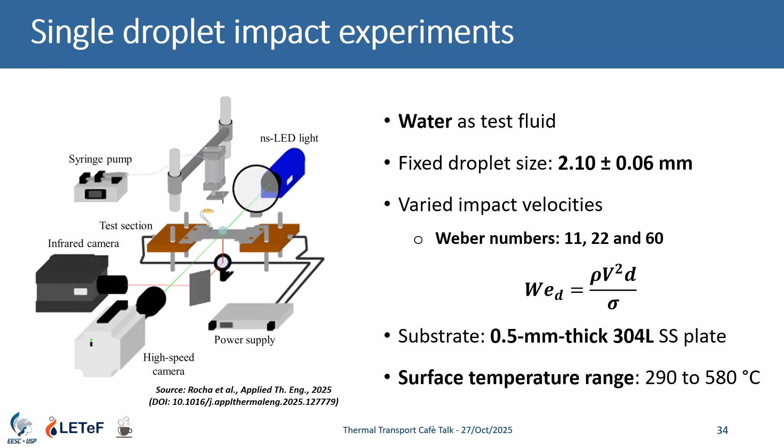Hi Arthur, nice talk. I had a question on the dissipation plots that you showed. Okay, I don't remember which slide that was. This one? So, yeah, this one. Is it?

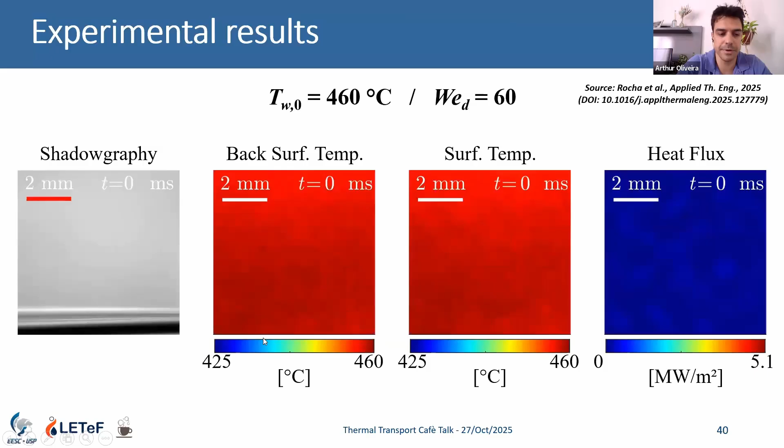We have contact here between the droplet and the wall. That can be seen, for example, in the video - when I launch the video, you can see in the shadowgraph images a lot of atomization. That's only possible because we have bubble nucleation during the droplet impact.

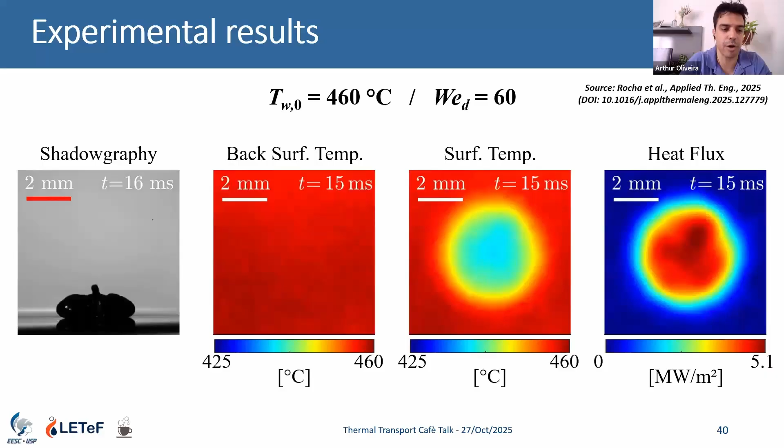But here, for the other condition at high temperature, we have droplet rebound, so the vapor layer thickness is already established. So yes, we can expect this kind of minimum, and after that we have an increase with surface temperature, which is actually what we try to propose in the model.

But regarding the model, we are not regarding this part of the data, for example. I see. Okay, and do you expect to see that?

I was just curious because it was like a monotonic decrease, but wouldn't you expect before you see the Leidenfrost effect, it should increase a little bit? And then once the Leidenfrost effect takes place, you have a decrease. Is that an expectation? Do you mean we should see an increase here? Yeah, and then a decrease, and after that an increase, right?

Yes, you are absolutely right. If we had some tests, we didn't put this in the paper because we tried to focus close to the Leidenfrost region. But we have one of the students here who did some tests at lower temperatures, and exactly as you're saying, it starts very low. Let's say we're talking about water here at ambient temperature. So when you have 150, 180 degrees, it starts to increase, then it reaches here. This is very close to the peak, okay? We have just a small increase here later. Then it decreases, then it increases again. You're absolutely right. Thank you, Suhas.

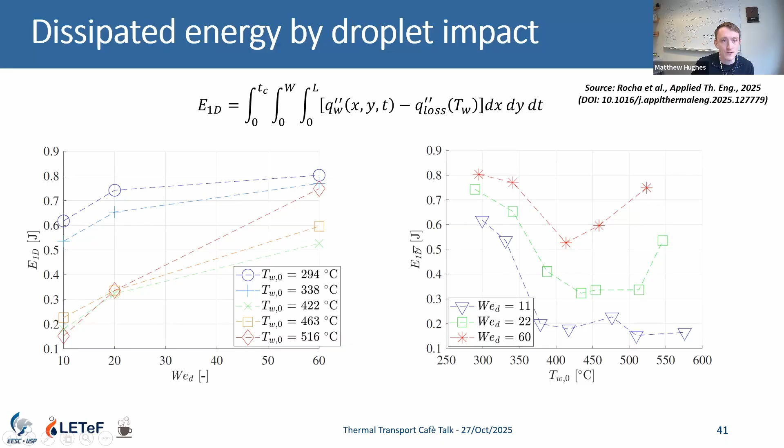Yeah, this one about droplet impact heat transfer. Here you can have the DOI. After, I think it's going to be available. The person can contact me, I can send the paper directly. It was in Applied Thermal Engineering, from single droplets to spray, some model and experimental data model. It was about 2 months ago, I guess.